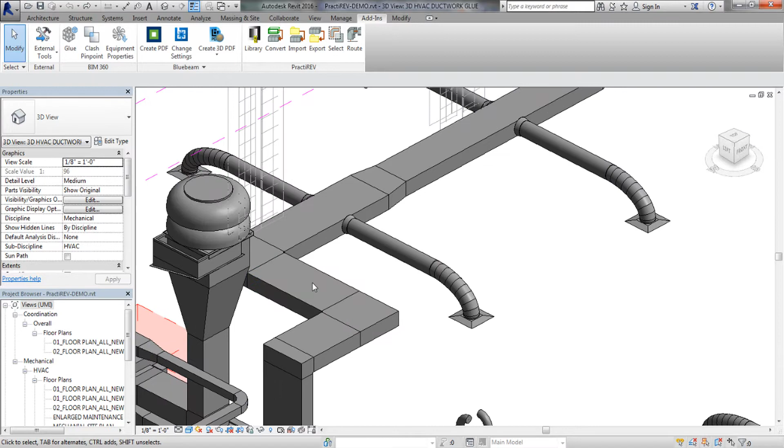Besides being able to import a drawing from PractiCAD into Revit, PractiREV also has the ability to convert and export out. This means we can take a Revit drawing and convert it into PractiCAD or PractiCAM. To demonstrate this, we're looking at a sample engineered drawing with no joints, flanges, or manufacturing data within the drawing.

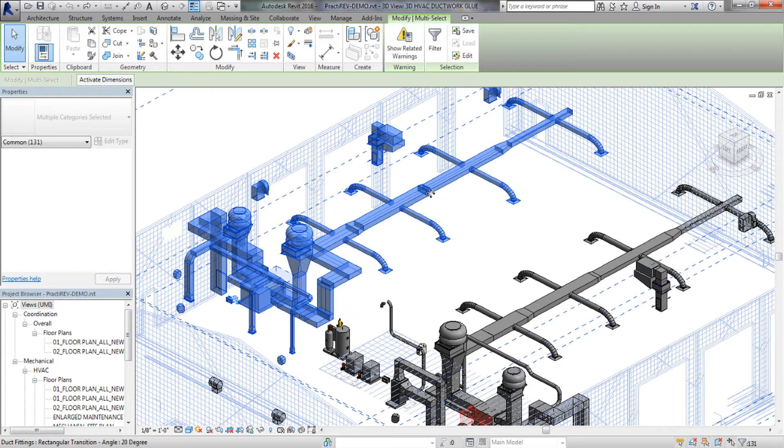First step is to select what we want to convert. This can be done with PractiREV's add-in selection tools, or you can use the Revit selection tool. Notice here we're just going to tab over this drawing and grab a hold of our first duct line. Once we have highlighted what we want, we go to the PractiREV toolbar and press Convert.

This will open up the conversion window. Here you can see we have choices for only showing items in takeoff and only showing unmapped items. You'll also see that PractiREV displays pictures of all the items that were selected and has a checkbox next to each one. If it's checked, it's already mapped. If it's not, it needs to be.

Next step is to simply map the unchecked items from a Revit family to a fitting you want to use in PractiCAD. In this demo, we will map a piece of Revit straight duct to PractiCAD straight duct, then a group of Revit transitions to a PractiCAD transition, and lastly, we will map a Revit conical to a custom PractiCAD conical catalog we have made from a reducer fitting.

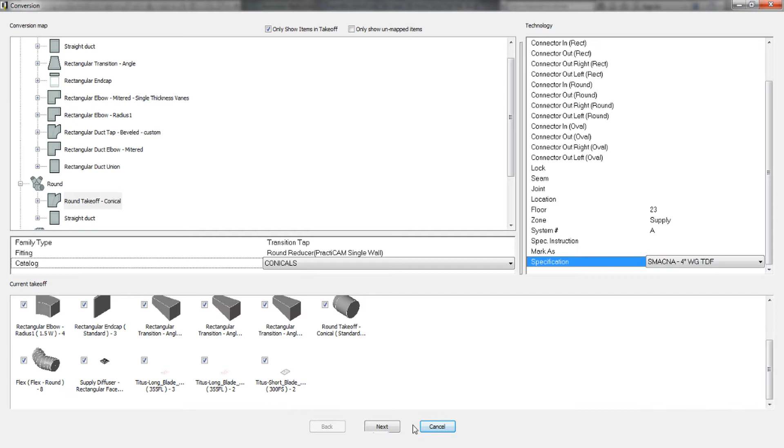Once we've mapped everything we need, we will select parameters like zone and specification. It's important to point out that all data from PractiCAD and CAM imports into PractiREV and can be used. So here we're going to select the 4-inch TDF specification so we can apply it to all fittings in our selection. Once this is done, we press Next.

Now you notice here as PractiREV displays the duct on the right in whatever view we choose and has applied our specifications to everything. Now all our manufacturing parameters are ready. However, notice you can still select fittings on the left and even adjust the parameters of individual fittings here.

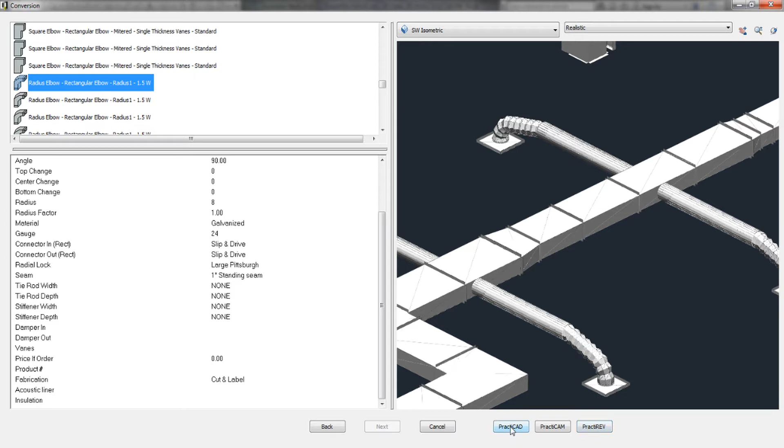Now we have to ask ourselves, what do we want to do? Export to PractiCAD, PractiCAM, or PractiREV. We can currently do all three. For this part of the demo though, we're going to convert this to PractiCAD. So we press the PractiCAD button and then save this section of the drawing to the background of our choice.

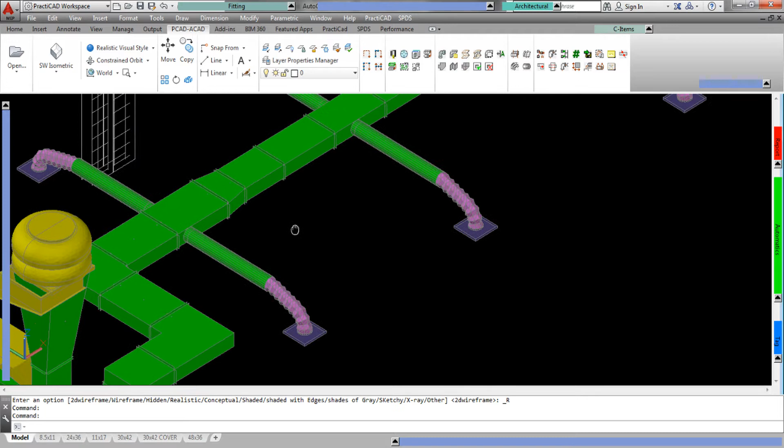Once we accept and hit OK, PractiREV will show us how many items have been saved and converted, and the drawing is ready to go. Take a look at this drawing now converted into PractiCAD. You can see here that everything has been converted, and we have our duct on the right layer and with all proper manufacturing standards.

Now let's go back to our Revit model again and highlight the second line we would like to convert. Tab over it, grab what we need, and hit the PractiREV Convert button again. Notice here that as we scroll through our fittings that everything is already checked this time. This is because once you've mapped the Revit fitting to a PractiCAD fitting once, it stays mapped forever, even between drawings.

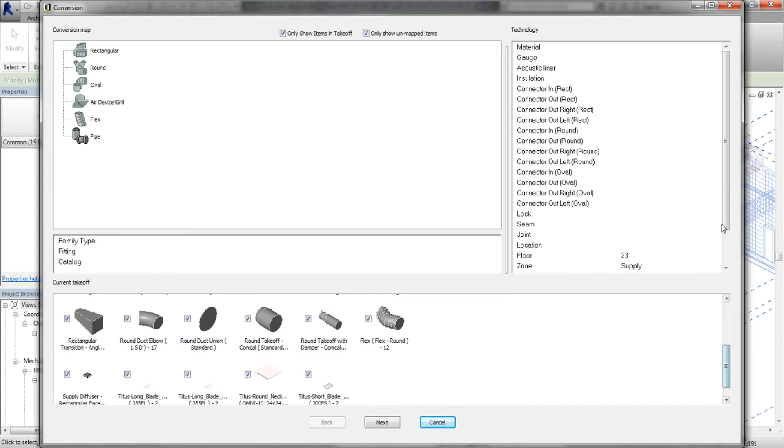As before, the next step now is to choose properties like zone and specification. For this second line though, we're going to make it a return run and a 2-inch slip and drive spec. Then we'll hit Next, and this brings us back to our preview window where we can see PractiREV has converted the Revit line with proper manufacturing specifications we asked for.

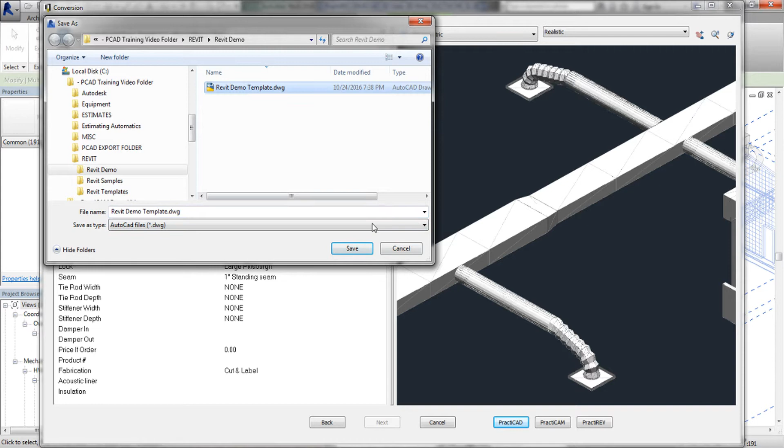Once again, we simply save this, and then we're going to append this line to the existing drawing we had before. PractiREV will now show us how many fittings we have converted over, and we're ready to go back to our PractiCAD drawing. Looking here, we can see that we again have all our proper manufacturing data applied. The duct is on the proper layer based on our preferences, and it's ready for editing.

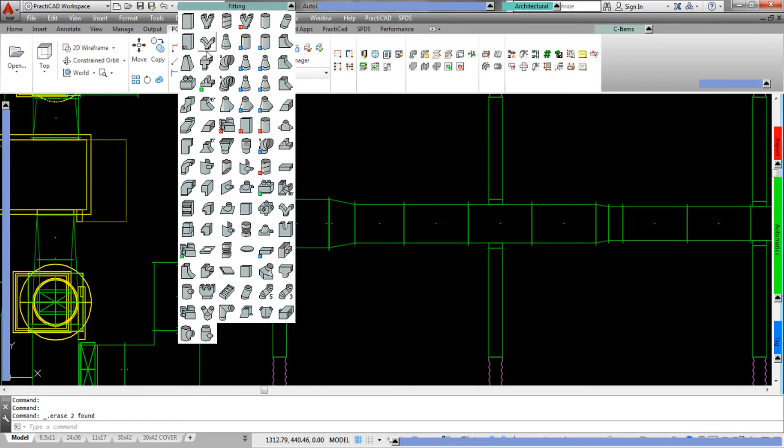If you've seen the PractiCAD program before, you would know that PractiCAD offers extensive editing capabilities, allowing the user to modify and change anything they may desire quickly and easily. Using these capabilities, we would simply modify the things on the drawing we want to change from the original engineer's model, and PractiCAD will update our drawing as we go.

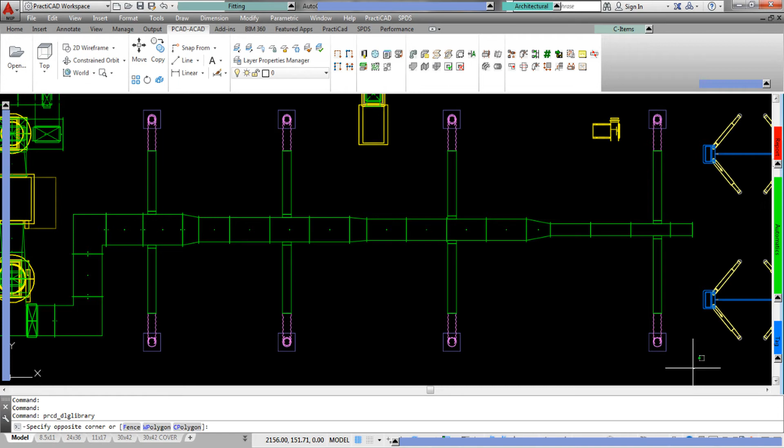Once this is complete, we can then use any other feature that PractiCAD has. For example, imagine we'd like to tag and annotate this drawing with size tags or possibly elevations. Using PractiCAD's tagging automatics, all we have to do is highlight the area we want to tag and press our tagging automatic button once. And yes, you are seeing this in real time.

Next, we'll run a different automatic for piece numbering. We simply highlight what we want to number, press our one-touch automatic, and now your drawing is numbered as well.

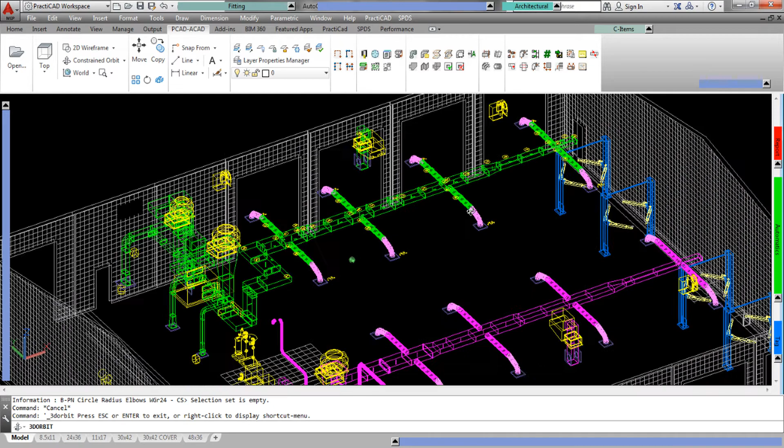Now we're going to simply orbit our drawing and take a look at it to make sure that everything is ready to build. If it is, we can now use PractiCAD's downloading capability to send all of these fittings to our manufacturing software, PractiCAM. This will complete the entire design to fabrication process.

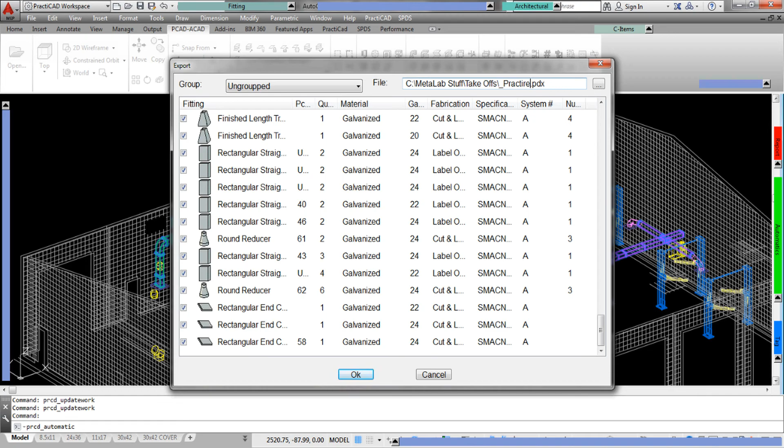Watch here as we highlight what we want to send over and press Export. When we do this, PractiCAD will list everything here we are about to download. We will confirm what we want to send and then name this job Practire. Now we are just one click away from downloading everything from PractiCAD straight to the PractiCAM program.